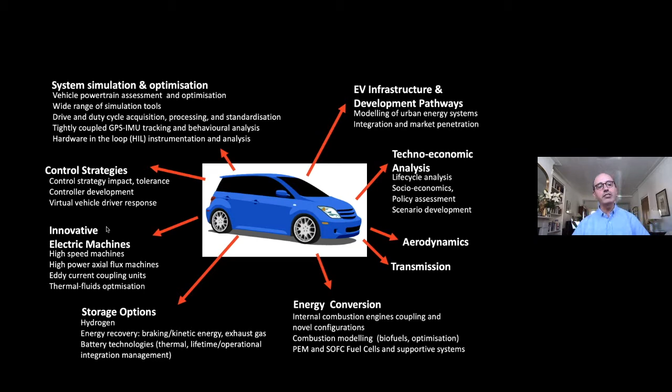The point of these slides is not to focus on any particular item, it's just to show you the very large number of items and the complexity of the image. So which is the most important thing to work on? What should I devote most of my energy, time, research funding, industrial research to do if I want to tackle CO2? To help that, with Dave Howie, we had a look at an equation going back many years, and this equation is going to be put here. This is the only equation I have. It's rather simple, but it's one that is worth understanding.

If we're looking at CO2 on the left-hand side, we say CO2 is equal to 3 things multiplied together. So that's as complex as it goes. You got something called D multiplying something called E, something called F, the last term. They're all multiplied. So the first thing to note is that if I minimize any of them, and I'll tell you in a minute what they are, if I minimize any of these components, D, E, or F, I make CO2 smaller.

And they compound each other. A bit of a change of D, a bit of a change of E, a bit of a change of F, compoundedly will give you, of course, a larger change of CO2. Second thing you note is that if any of these terms is 0, the total CO2 would also be 0. All fairly evident and simple mathematics.

The next term is called E, which is the energy conversion. It's how much energy do I need to move 1 kilometer? I have to travel those kilometers. I want to know how much energy will be consumed to deliver a single kilometer of movement.

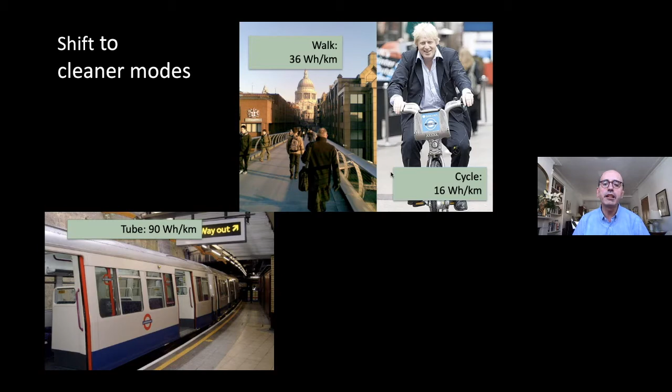That would affect that particular number. But it's certainly far more energy consuming than cycling and walking.

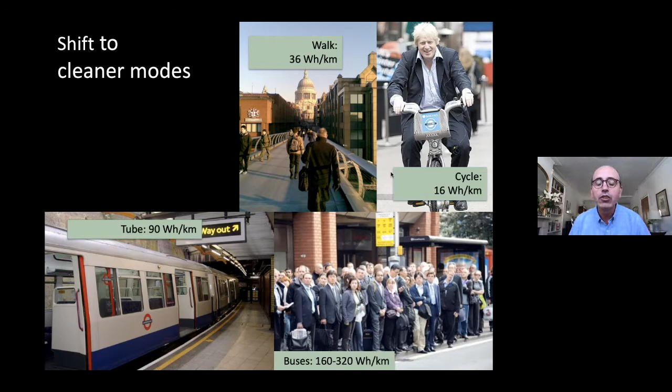If you take a bus, and this is not the best picture for a bus stop because there's lots of people, not all buses have this large magnitude of people on the bus stop. But I put a range, and the range is needed because, of course, some vehicles, some buses are regen braking, some buses are hybrids, some buses are fuel cell buses. It's a whole range of buses, but for a typical bus journey, somewhat between 160 and 320 watt-hours per kilometer.

So a lot of mass we're moving from A to B, a lot of the time per passenger, I should say. Everything here is per passenger. A lot of the time, you've got a lot of mass movement and a relatively small occupancy in many of the journeys. Having said all of that, how is a car compared to this?

If you take a vehicle, a normal mid-sized vehicle like that picture, that's about 600 watt-hours per kilometer. So you see, immediately you say, indeed, the energy needed to move from A to B for a standard-sized vehicle is substantially higher than anything else. That I think we mostly knew, but now we definitely do know, and I have some evidence to back up that number too.

So indeed, if you now decide to go with 2 people, that goes to 300. And you go to 4 people, you go to 150. Now you're starting to get somewhat competitive to the other technologies on this picture.

So it is good to put things in the right order. Part of my talk today is about classifying, simplifying, but achieving some outcomes of this talk. And this is the purpose of this particular slide. It's not to fixate on any of the numbers. It's to realize the order of magnitude.

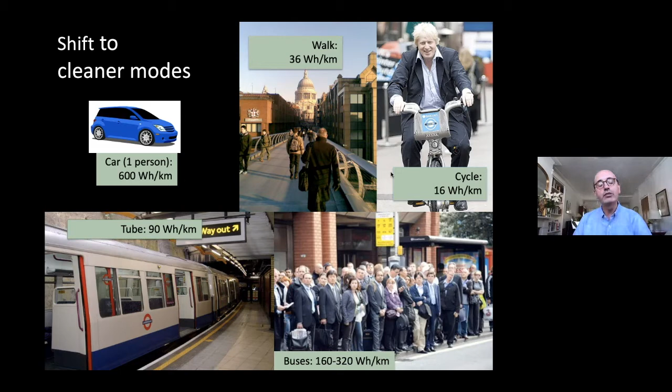When you take a car, this is what you will incur in terms of energy usage. A bit more engineering base. I'm at the Department of Mechanical Engineering. So you would see here a little bit of mechanical engineering going on.

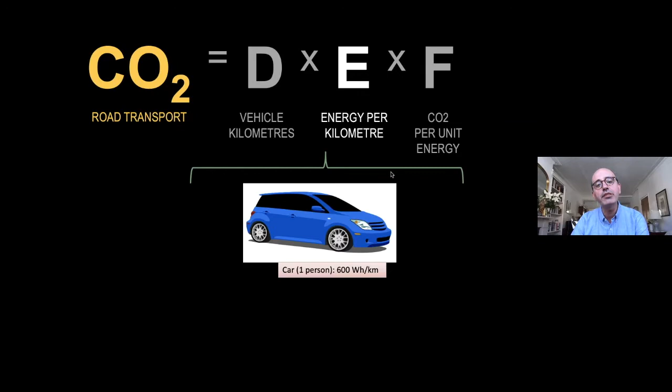So what drives the energy for 1 kilometer? Well, first of all, the car we had earlier. Just remember this image, about 600 watt-hours per kilometer, a lot more than the others, and just one person.

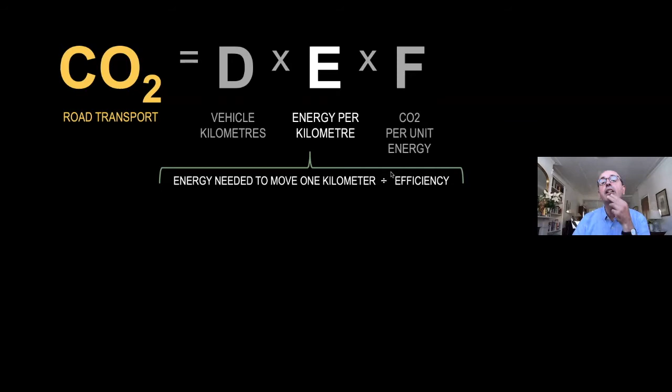But what drives that energy? Well, one thing that drives the energy is the conversion technology. You have an efficiency divided by the energy needed to move 1 kilometer, divided by an efficiency is going to give me the energy per kilometer. What drives the energy to move needed, now the energy needed to move 1 kilometer?

Well, drives really 2 significant elements. A bit of mechanics. We all know that your speed of motion is significant when it comes to loss, aerodynamic loss.

We also know that the speed of motion is not hugely significant when it comes to rolling resistance, but that's only by weight. So that at a given time, the energy to move from A to B is driven by.

2 elements which have an addition, a plus sign. It's how much you lose in aerodynamics, which is the shape of your vehicle, amongst other things, frontal area and shape. And added to it is the resistance to move due to the wheel and road interaction.

Important topic here is that the rolling resistance prime element is the weight. So shape and frontal area and weight. They are the 2 parameters, and because there is a plus, they're both important.

They're both, I wouldn't say equally important, depending on the forward speed. As you know, the aerodynamics goes with the square of your forward velocity. Very straightforward analysis. But you see, that's a given time.

What I want to perhaps get to now is this lower set of words. At any one time, as a driver, you may be doing a whole variety of actions.

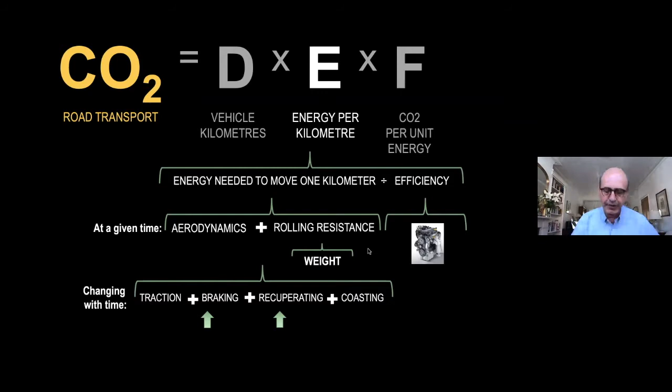If you've got a combustion engine, which we're going to see in a minute, the weight may be lower, the frame of the vehicle may be lower—there may be reasons the overall weight can be substantially lower. But your conversion efficiency is poor, very poor, and therefore the net effect is that even though you're lighter, your poor efficiency conversion drives energy demand up, making it a less efficient, more energy-demanding system.

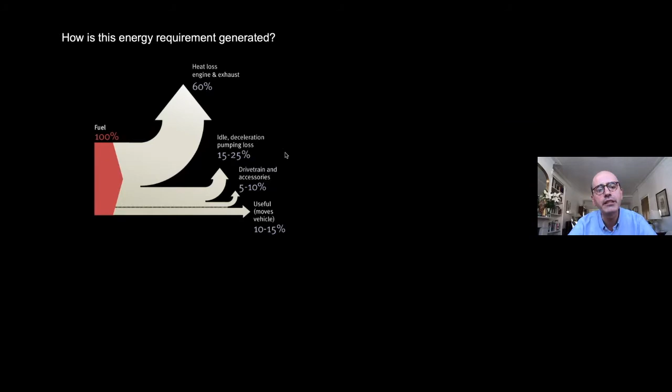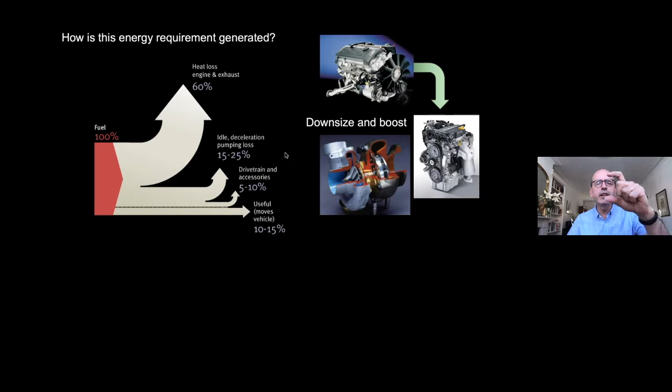The point is that we work in my group on making engines more efficient as well, and that has been tremendously important in making sure E, the middle term of my equation, is low. So we work on all these systems: improving combustion through reduction in order to reduce emissions, and exhaust energy recovery. We've got several concepts that aim to recover some of that 60% wasted heat, which is hugely important.

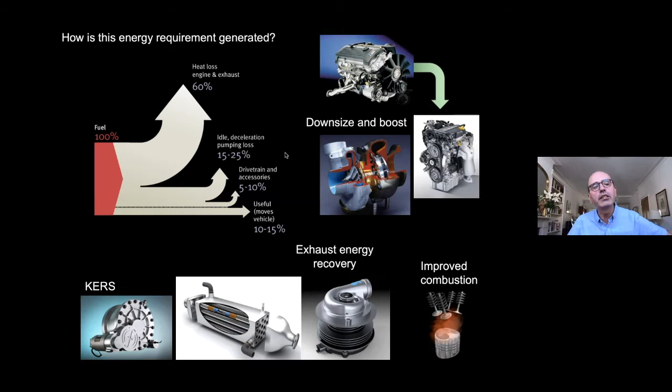is more electrification towards 2025. You'll see, of course, huge developments on battery-driven vehicles and hybrids. But I think you'll also see a lot of developments on current technology being more electrified. Your engine becomes a smaller portion of a more electric machine. You might have electric turbochargers, electric waste heat energy recovery systems, and electric boosters. So I think there will be substantial effort still towards electrification of the current system.

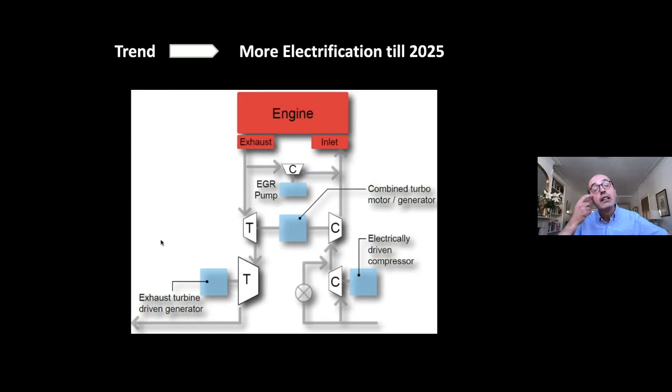Now, that's not going to take us as far as we want to go, as we'll see later. Let me show you one technology that we've been involved in: the idea of making engines smaller. So that's a 2 liter and that's a 1.4 liter behaving in a similar way, yet achieving a fuel economy of that kind of magnitude.

So this engine here at the bottom is somewhere between 25 and 35% improvement, a big range, because we got involved in two programs at Imperial, and one of the programs was closer to 25, the other closer to 35. One is a 1.1 liter gasoline engine, the other is a 2 liter engine. So a substantial gain. Our engine technology has enabled E to be reduced by that kind of magnitude.

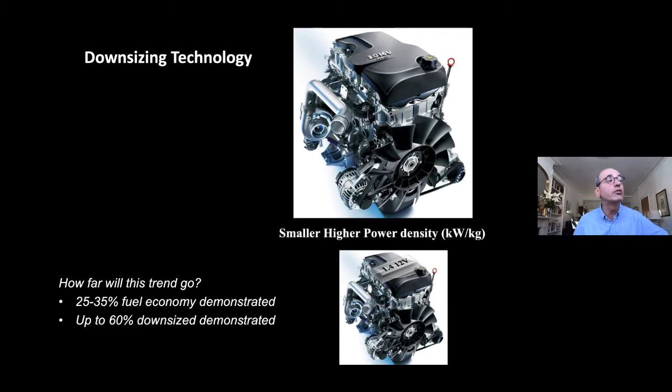And as we already alluded to, that is not sufficient. And then we move into hybridization. We'll talk about that in a minute, that happened to be the program I mentioned earlier. So more electrification, more complexity, more electrical machines and conversions into the drivetrain. Unfortunately, higher cost too, because of course the more complex the technology, the higher the cost.

And demonstrated on the road: high boost, led by Ricardo, which is not me, a consultancy in the south of England, and others including Ford. 38% fuel economy improvement. The vehicle began at 168-169 grams of CO2 per kilometer, and ended up around 102.9 grams per kilometer. It's worth noting this, of course that takes us as far as a few years.

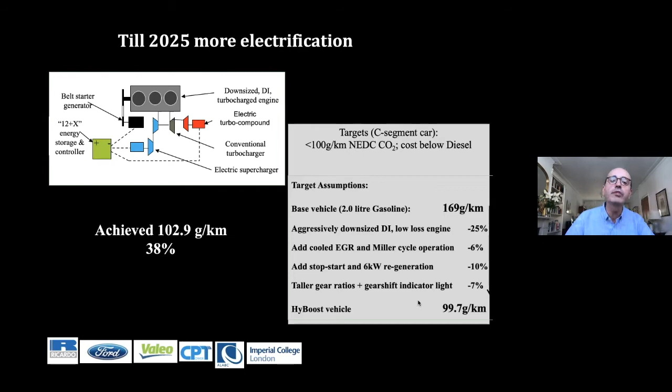I'm going to pass this because there's little time, so I'll go straight into my final term, F. We said D drives demand, E drives how much energy is needed to move one kilometer. What about F? Well, F contains our classic fuels, and our classic fuels have a big cross over it, meaning no, please.

And perhaps more advanced fuels: advanced biofuels, synthetically derived fuels hopefully sustainably, and electricity hopefully with low or zero carbon content. If we can achieve this distribution of net zero carbon content, then indeed, which can never be done with conventional fuels, it's not feasible to do it that way.

We can get F to near zero, which is the objective of the government's 2030, 2040 target. So we need biofuels, synthetic fuels, and electricity, all sustainably derived. That will make F near zero. Of course, if F is near zero, no wonder we focus on fuels and energy carriers, because if F is near zero, then indeed CO2 will be near zero, no matter what D and E are. And hence, the only term that can make it zero is F.

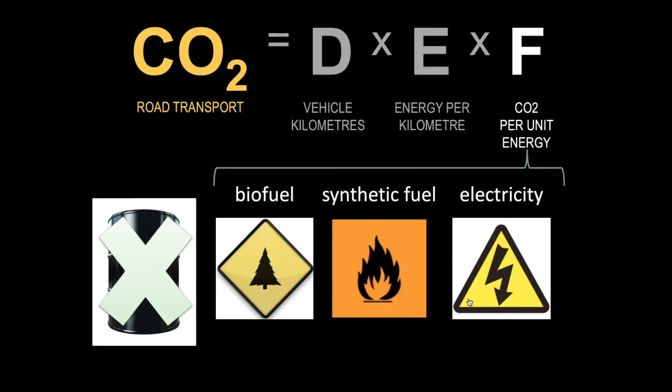Hi, I think I lost that. Hello? Okay, yes, you're back with us now, Ricardo. We're still back on? Okay, so I'm back on. Apologies, the internet is playing up here.

If the only thing I can make really zero is F. Because you can't develop a machine that has no energy need to movement. I can't think of one. And we're not going to become a 100% isolated economy without movement. So indeed, F is the source.

Now, I don't have hydrogen here. It's not because I don't like hydrogen. I put it within synthetic fuels.

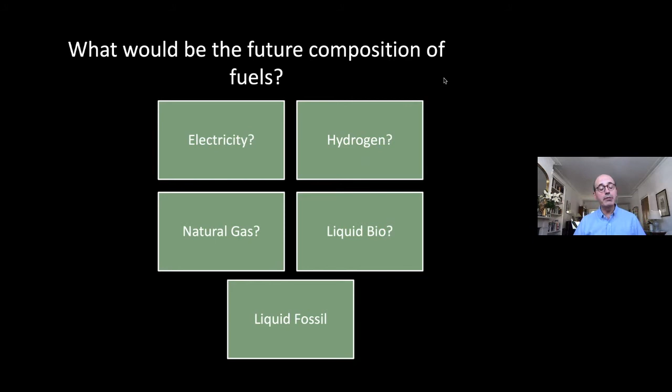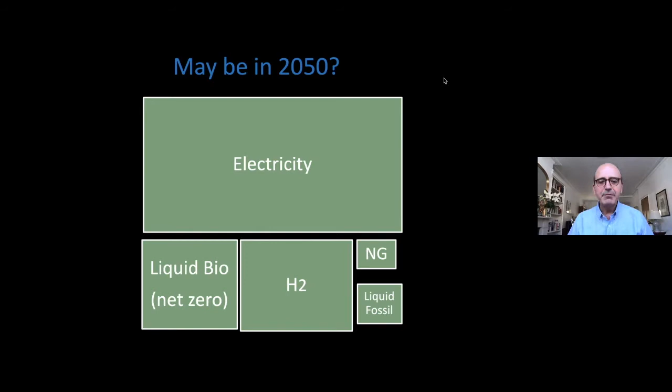But I don't know what the world will look like. This is a possibility where I think the world will be heavily dominated by electricity for movement. I think you will have some areas of high hydrogen content, areas where you might not be able to deliver your electrical motion simply because of the power density needed in terms of the weight of batteries to be carried. I think there will be, hopefully, a large demand for this sustainably net zero liquid biofuel. There'll be some natural gas, and some required liquid fossil fuel of today's kind. That's kind of a hand-waving statement - my current hand-waving statement.

I'll pass that. So we look at energy recovery. One of the items as I move towards the second half of my presentation - I've done most of it, I've got about 5 minutes to go.

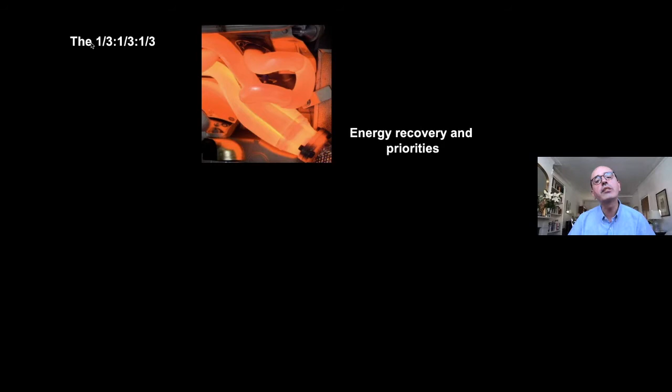I work in our team, we work on energy recovery. I said in my abstract that energy recovery was important. The point here is that you are using energy in a combustion engine, and any thermodynamic machine, typically in a ratio of 1/3, 1/3, 1/3. It's given here: 1/3 in the tailpipe, 1/3 in the cooling of the system because otherwise you will melt down, and 1/3 would be the output. So 1/3 of energy recovery, energy usage, and then 2/3 of wastage, at best. I showed you a picture earlier which was worse than that, but typically in a good operating mode you should be able to get 1/3 of energy conversion. So it's absolutely crucial we make better use of this energy content.

So in the exhaust, you might have flow energy you want to convert to mechanical energy. You might want to convert thermal energy into electrical energy, or you might want to convert thermal energy into thermal energy. So there's three things here.

I mean, we've not seen this before - I'll take just a minute at most to explain. You could say, I'm going to put a mechanical turbine in the exhaust to take energy from the exhaust and produce electricity through a generator on that turbine, or something similar. I will call that flow energy to mechanical energy. That exists today. And we can tackle the 1/3 of the top equation - at least I can tackle it this way, if not the 2/3, but at a minimum 1/3.

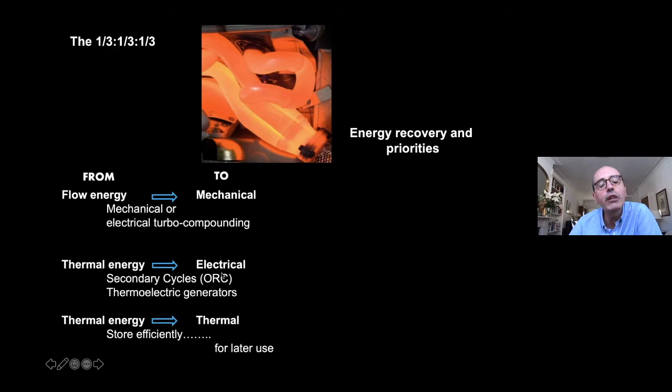Today's more advanced ideas are talking about getting thermal energy direct into electrical. That means through a secondary cycle, what we call an organic Rankine cycle. You take some of this thermal energy, put it through effectively a steam cycle - not quite steam, but a refrigerant cycle really - and then you take that energy out into electrical form and store it.

You can do even better than that if our technology, our scientists, our material scientists, particularly here as well as others, can transform thermal into electrical. Wouldn't that be wonderful if we could do that? Well, we can do it through an effect - the Seebeck effect - which is what drives thermoelectric generators. You get thermal energy straight into electrical energy, straight into storage. Wouldn't that be wonderful? And if we can make that efficient and cost effective, that is an area of excitement if I was a new researcher entering the field, which I'm not.

Finally, even more exciting, we could take the thermal energy of any process, including an IC engine, and store it. We can store it for later use. How often do we use energy for a purpose direct? Sure, often.

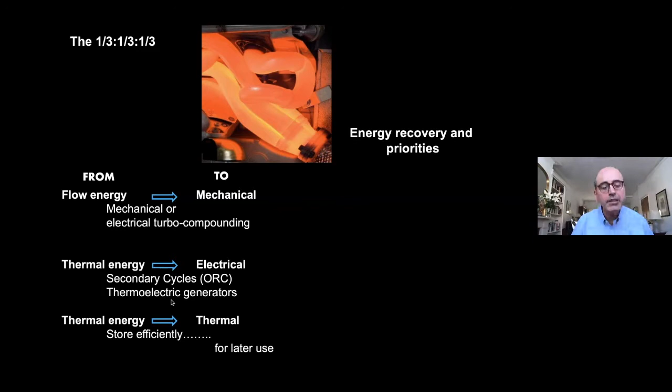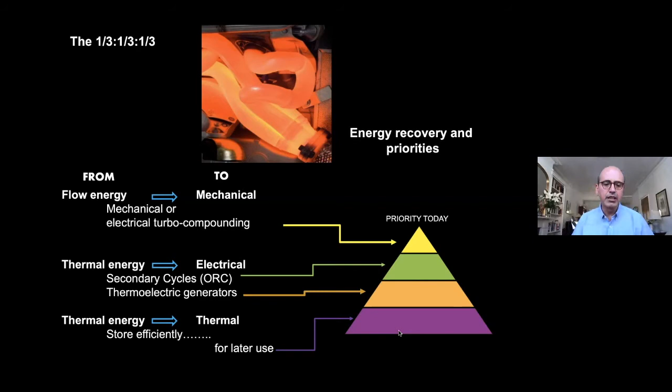How often we use energy and then we waste a lot of it, and later on we want the energy back, or we want a cooling effect, or air conditioning. That is what I call thermal energy into thermal energy. Today it is available to do flow energy into mechanical energy, but it's less available to do thermal energy into electrical energy, so the area of research is higher. And at the bottom of this pyramid, the area of research is even less known. So no wonder we talk about thermal storage as a key element that is fundamental when it comes to any thermodynamic machine.

So the future opportunities are much higher in the years to come, if one can come up with the science, the materials, the storage mechanism by which you can store thermal energy into thermal energy for later use. That is a good topic if I was writing a new proposal as a young investigator.

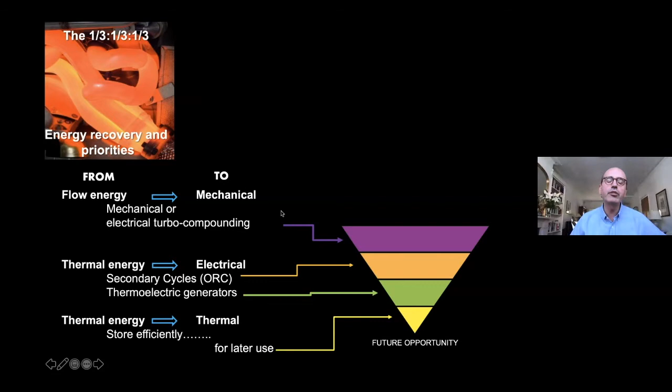I think thermoelectric generators will be fundamental. There's lots of things still to be done on those because the efficiency is low, but it would be a future opportunity at the top of the pyramid, and then lesser and lesser, because at the top of the pyramid, inverted here to demonstrate this, is actually already available today. The reason why we don't do some of the things at the bottom of the pyramid here in yellow is because they are not cost effective, and therefore there's a whole mechanism of making it cost effective.

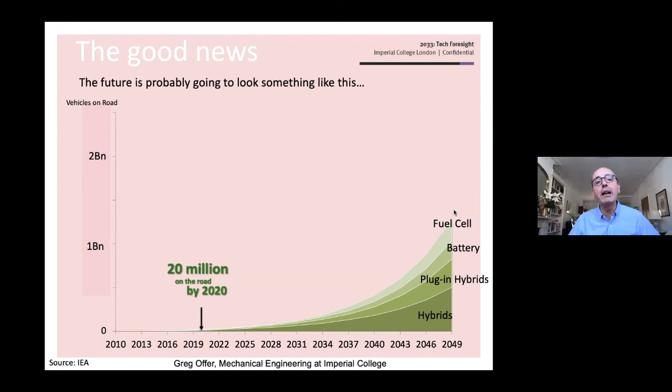And so if that was the case, this growth rate here is not near enough sufficient. One consequence. Second consequence, the number of vehicles in 2050 is approximately similar to the number of vehicles today which are based on combustion systems. Now, legislation might tell us otherwise. We might locally legislate and provoke a different change. That is what is being proposed.

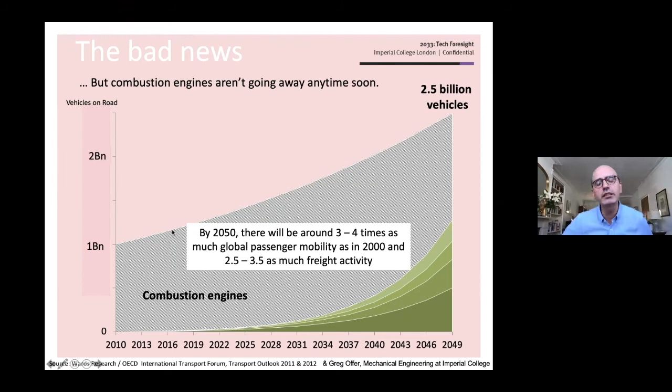So one, not enough. Two, it doesn't look great in 2050 unless something else changes. Three, the demand curve would have to be curtailed to enable this not to happen. So with that, I finish with this slide. It's the final slide, and I'll take questions or comments.

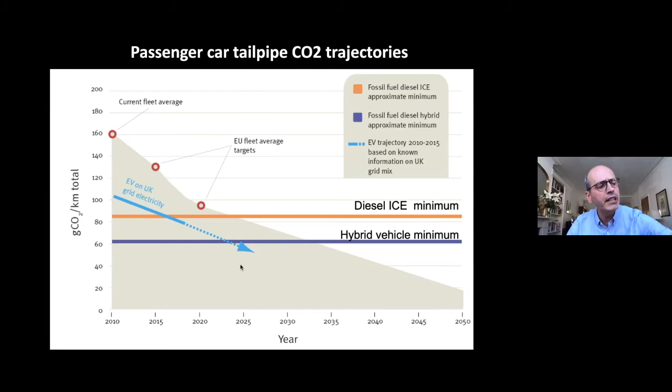That was my last picture. And with that, I think I'd rather take questions now. Hopefully I left you a picture that says we've got to do better, but we are doing rather well in some areas. And hopefully gave you a few tips: vehicle occupancy, driving behavior, and of course, the ever increasing need of continuing to work on energy vectors, particularly on net zero energy vectors. With that, I'm happy to take comments or questions.